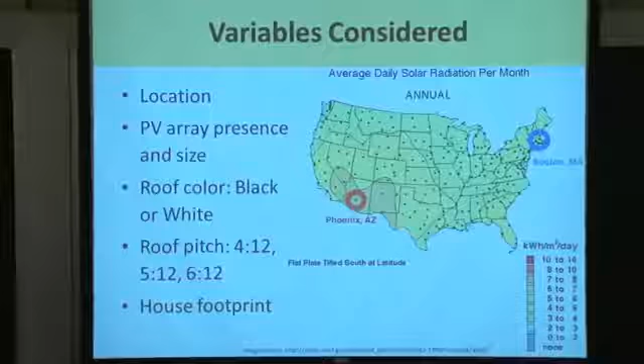We looked at roof pitch. First off, roof pitch is the angle of your roof. And we looked at this because we assumed that our panels were fixed and parallel to the roof. So this controlled what angle your solar panel was facing towards the sun. And finally, you had your house footprint, which is the area that the house covers. And when you combine that with the roof pitch, you get the area of the roof, which is really what we're concerned with.

We had 5 scenarios. And as you can kind of see from our cute little diagrams, we have a black roof, a white roof with a tree, a white roof with a solar panel, and a white roof with a solar panel and a cut tree so the solar panel is getting plenty of sunlight. In evaluating the 5 scenarios, we had 3 models of increasing complexity from left to right, which you can kind of note from the fact that Model 1 only covers 3 of the 5.

And these models all had common assumptions. The first was that you had a single-story house in a suburban location, so you didn't have shading from other buildings, for example. We had a common house size of about 2,000 square feet, or 186 square meters. The roof pitch, which in construction is set usually at 5/12, which means 5 inches of rise for 12 inches of travel.

We had an unfinished attic space, which means that it's sealed to the outside, but you didn't make it livable. A 5 kilowatt PV system covering 36 square meters. And we chose reflectance values of 0.08 for black and 0.35 for white. And this again reflects the effect that color has on heat absorption. With that, I will turn you over to Jordan.

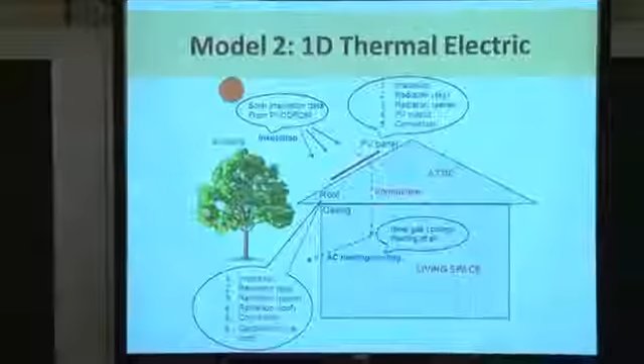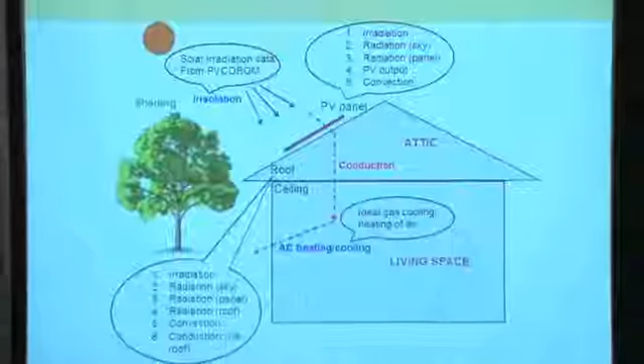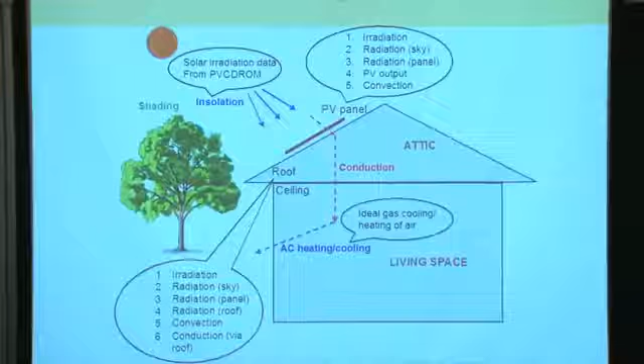We have a thermal model which takes into account several input conditions such as the insolation and shading, and it outputs a living space temperature, which is the temperature of the living room in our house. And then this temperature is fed into an electric model which calculates the cost and energy values, and thus we can compare energy production and energy consumption.

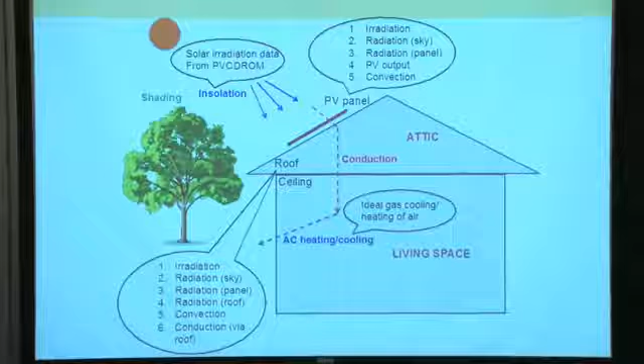To go into the thermal model in detail, I have just shown a picture here. So when we start from the top of the house, we use insolation and shading as the input parameters. We then calculate the temperature of the PV panel and then the temperature of the roof using 2 different energy balance models. And these 2 energy balance models are pretty robust in the sense that they consider all these physical phenomena which are realistic, such as the convection, radiation, and PV electrical output, and based on these energy balance equations, we can calculate the PV panel temperature and then the roof temperature.

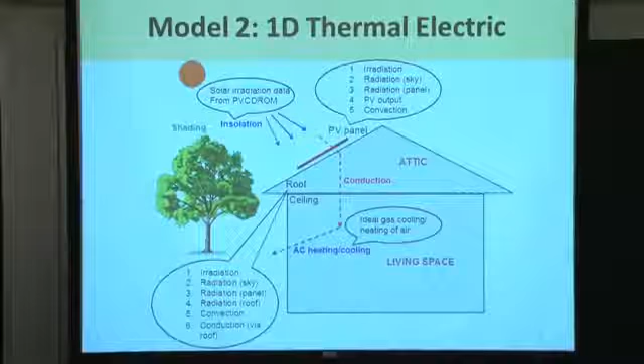And once we get these two temperatures, we get the heat flux that goes into the roof and that enters the attic. And once we get this, we find out the attic temperature, which then determines what is the ceiling temperature. And then we consider the conduction via ceiling, and then finally we end up with the living space temperature. And then we couple this living space temperature with another electric model, which I'll discuss now.

So the electric model is basically based on an ideal gas assumption. What it does is it calculates the energy needed by the AC, which could be either heating or cooling, in order to maintain the living space at a particular temperature. And we use this formula m dot Cp delta T, which is an ideal gas formula, which gives out the energy needed by the cooler. So the electrical model gives us the power consumption, and then we know the power production through PV output. So comparing these two, we can really assess whether PV installation is favorable or not.

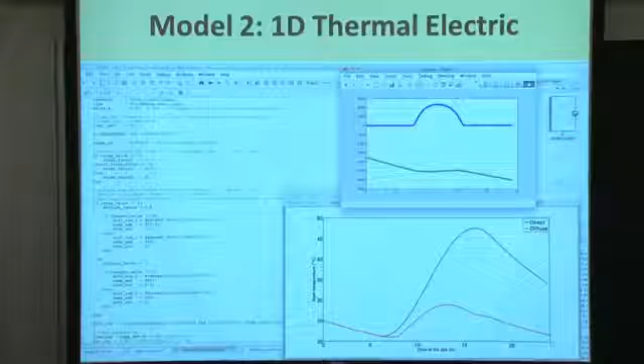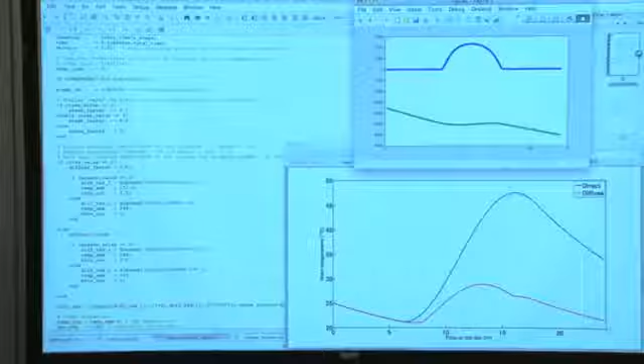And this is just the model in making. What we want to signify here is we actually made this model on our own, and this is the MATLAB code we wrote. And the model not only just predicts energy values, but it also can do a lot more things, such as predicting temperature. And what I've shown here is the PV output and then the cooling load that is required. So it can do a lot of other things as well. This is the temperature of the roof, in terms of direct sunlight and diffuse sunlight. So if anyone is interested, I'll be happy to discuss with them more.

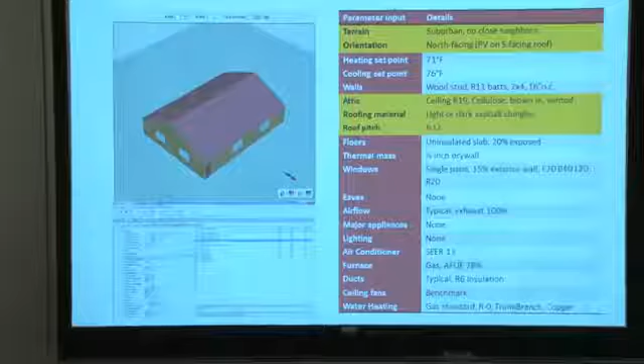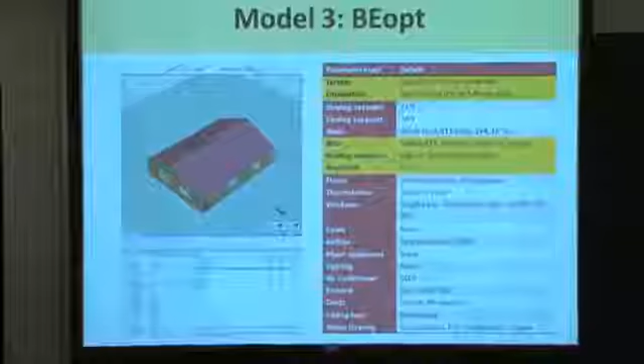So I take over from here talking about the third and most complex model that we used. For this model, we used two different softwares, one called BEopt from NREL, and the second called Energy Plus, which you'll see later, developed by the Department of Energy. So what we did in this model was we took into account the 3D effects of these thermal and electric loads that have been talked about in the other two models.

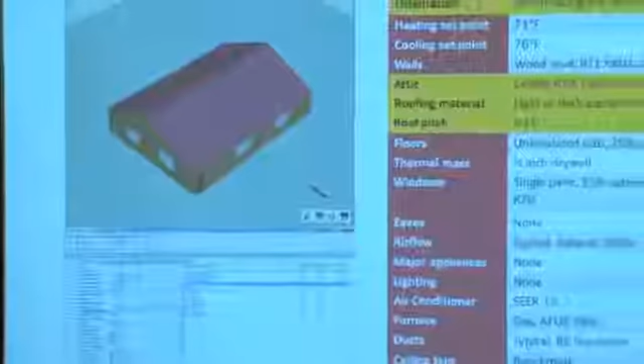The first thing we did was to actually model the 3D house, as you can see right over here. BEopt allows for a very nice interface where you can easily model the house and easily input a whole bunch of input parameters for the house. And for these input parameters, we consulted with an experienced building inspector for the construction inputs and used BEopt default values for the rest of the inputs.

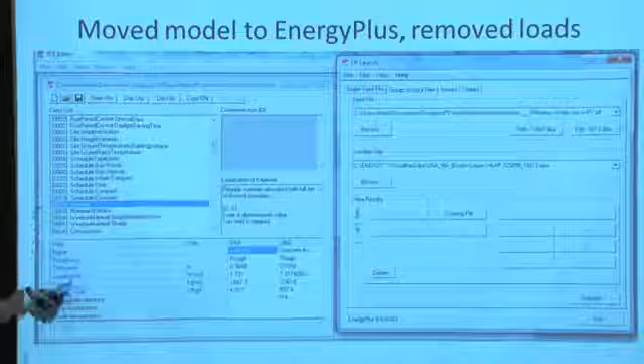Once this model of the house was done, we had to actually export it into Energy Plus, because Energy Plus gives us a much more detailed look into all these different parameters. And you can actually go in and modify different things. Like for the materials, we can modify every single material property: conductivity, density, specific heat. And we actually did that for the roof. And we also removed a whole bunch of other miscellaneous loads that BEopt had included.

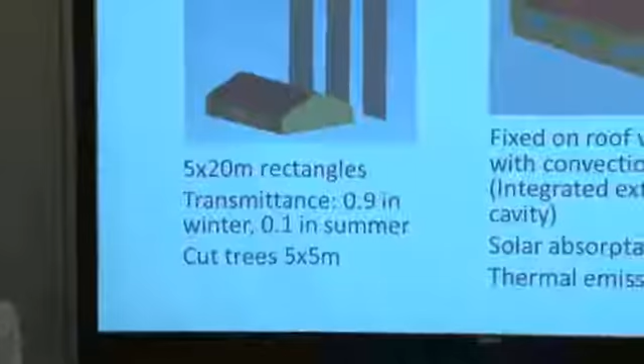So this is how we modeled the trees and the panels that we talked about in our scenarios before. For the trees, we modeled them as these really large 5 by 20 meter rectangles that act as shading for the house. The trees are located on the south side of the house, and we modeled them as deciduous trees. So we set up a transmittance schedule so that they have a higher transmittance in the winter when the leaves have fallen, and a lower one in the summer. And for the case of scenario E, in which the trees are cut, we modeled the trees as being 5 meters tall.

On the other hand, for the PV panel, we modeled it as being fixed on the roof. We actually had to completely change the model from BEopt because they modeled it as being decoupled from the entire system, placed 30 meters away from the house. So we completely changed that, and we read extensively into Energy Plus literature and found this particular object called the Integrated Exterior Vented Cavity Object.

And what this does is it models a surface as being, in our case, 0.05 meters away from the roof, and it models the convection and radiation between these two surfaces. We also considered the solar panel to have a solar absorptance of 0.92 and a thermal emissivity of 0.9.

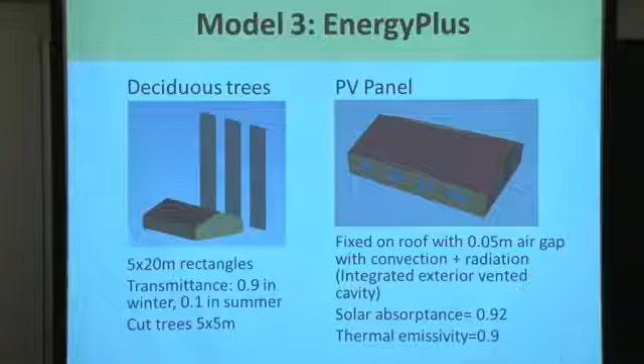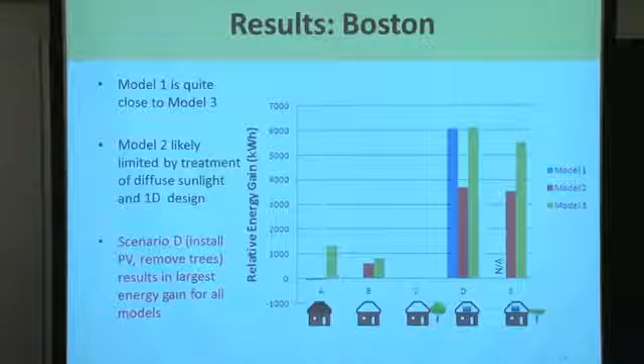Okay. And then, so we actually got a lot of results, as you might imagine, from all those different models. But just for the purposes of comparison for the presentation, we're just going to show you summarized results. And basically what we're showing you here is specifically for Boston. In this figure, the y-axis is the relative energy gain. So in order to compare them, we decided within each model to compare it to a common situation.

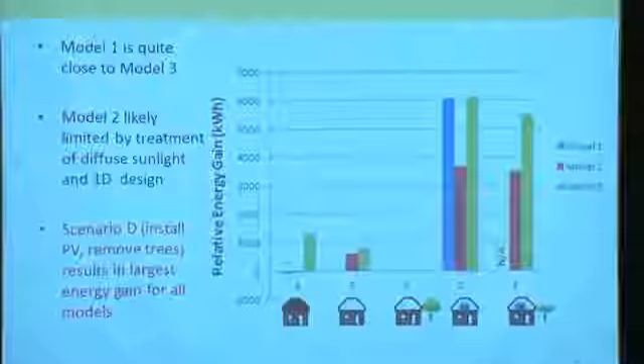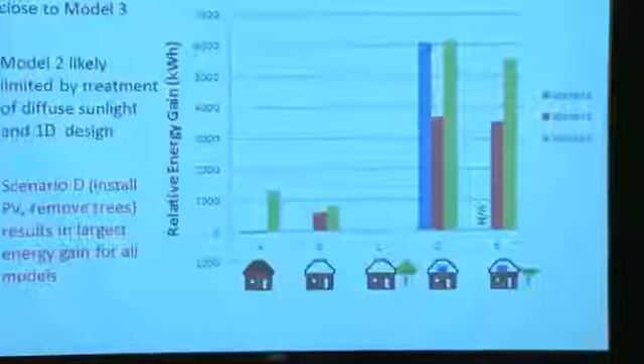So we decided to say that if we're in Boston, let's say we start with a white roof and a tree. So that's scenario C there, so that's why it's 0. So everything is in comparison to that. And right off, we could see that, as we might expect, putting a PV on makes sense energetically. And specifically scenario D, which is where you completely remove the tree instead of just cutting it, in Boston at least, is what makes the most sense.

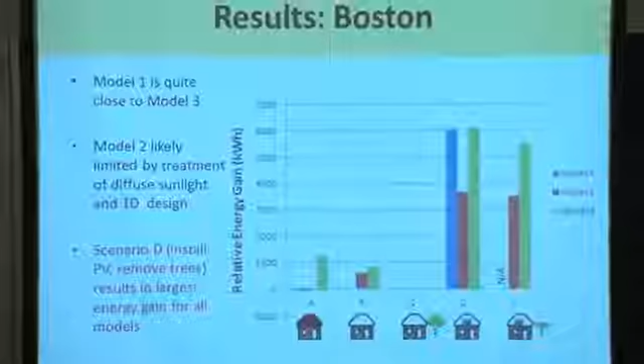And this is for all the models, although Model 1 can't really model a tree necessarily. So that's why it basically doesn't apply for that. In terms of comparing the results between the models, Model 1 actually does a pretty decent job in Boston in getting close to Model 3, which is impressive because Model 1 is significantly more crude, much simpler than Model 3, which required many, many inputs.

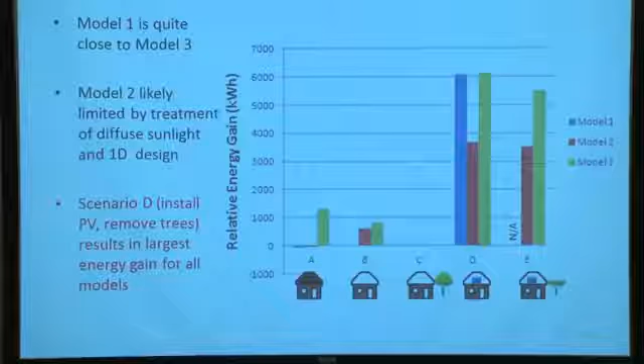And the reason we believe for the discrepancy between Models 2 and 3 is that in Model 2, the way that we treated the solar insolation, it doesn't treat diffuse sunlight differently, whereas the models in PV Watts and Energy Plus will take all that into account. So we think that's a large reason for that.

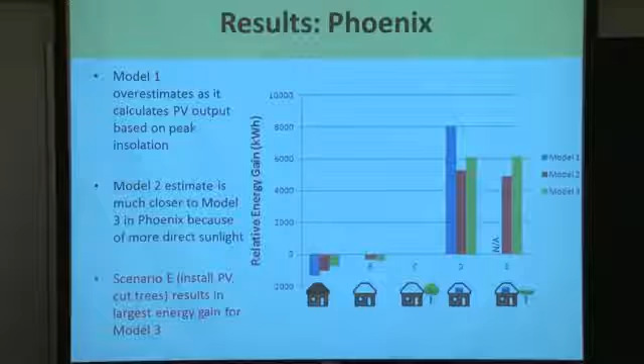And then a similar thing in Phoenix, and basically we see a slightly different case here, actually scenario E, where you install the PV but you cut the tree instead of completely removing it, gives you a slightly better increase in net energy gain. And this is again just in terms of energies, there could be rounding errors. This is ignoring the fact that if you cut a tree down, the net greenhouse gas emissions would be altered, and this is ignoring all those other effects. This is just in terms of net energy gain of the house.

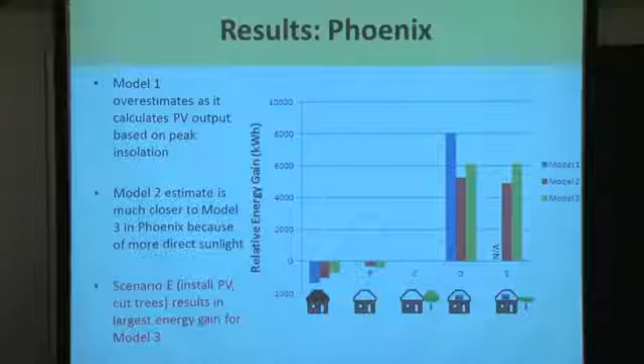And just to point out the discrepancy with Model 1 here, Model 1 is using PV Watts to get your energy output, and that's basically assuming peak power or peak solar insolation, whereas our models use more empirical formulas to get the estimates for your PV output.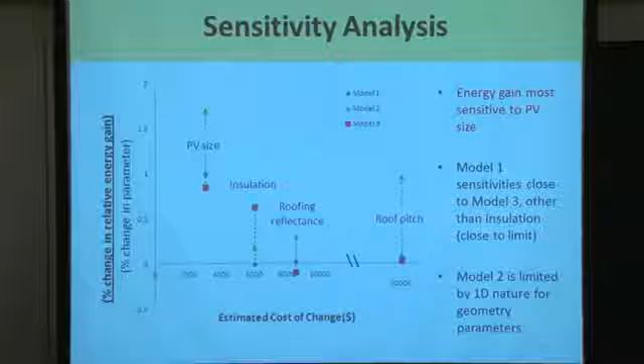And then the last thing we did to compare the models was a sort of sensitivity analysis. So on your y-axis, what you have is your % change in your relative energy gain, relative again to scenario C, divided by the % change in your parameters. So we just considered 4 parameters. The x-axis is a rough estimate of how difficult it would be to actually change that parameter in your house.

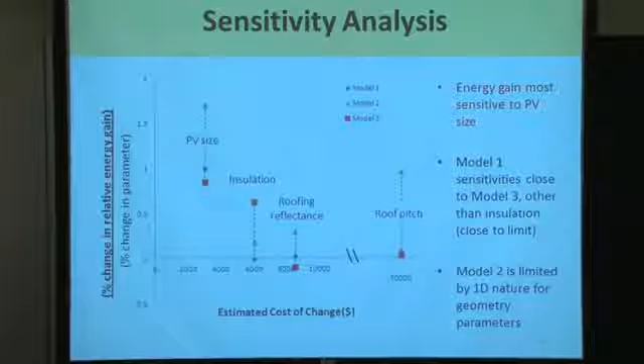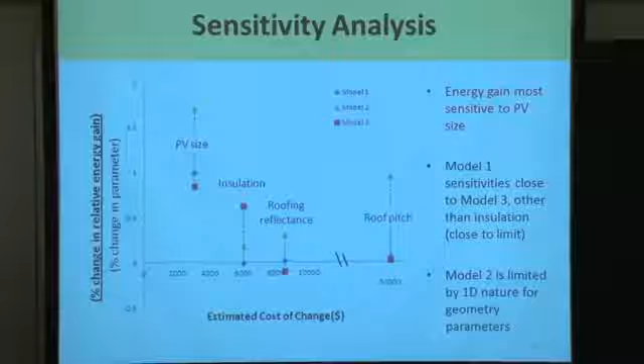So the far left one is the PV size. We just assumed you went from a 5 kilowatt to a 5.5 kilowatt. So that's why the price is roughly $3,000. We assumed about a $5 to $6 per watt installation cost for that. So that's basically the easiest one to do, and you get a very significant change in your thermal energy gains because of that. And just because of time, I'm going to brush through these, but basically a lot of the models follow similar trends in terms of the sensitivities.

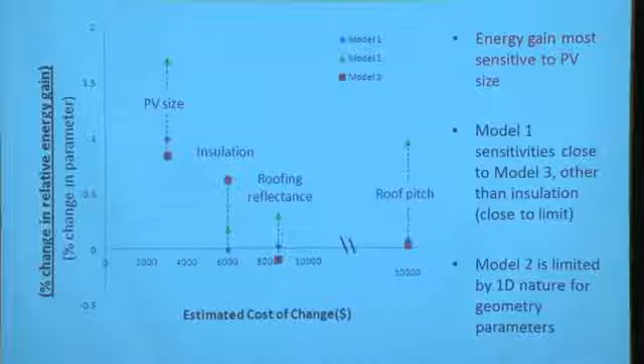The last one is the roof pitch. You obviously wouldn't really want to change that. It's very expensive to do. Luckily, for most of the models, it's not actually that sensitive to it, at least within a close amount to where you start. So in conclusion, in all 3 models, it makes sense to install a PV system. It's kind of what we expected from the beginning, but it's nice to get that sort of conclusion.

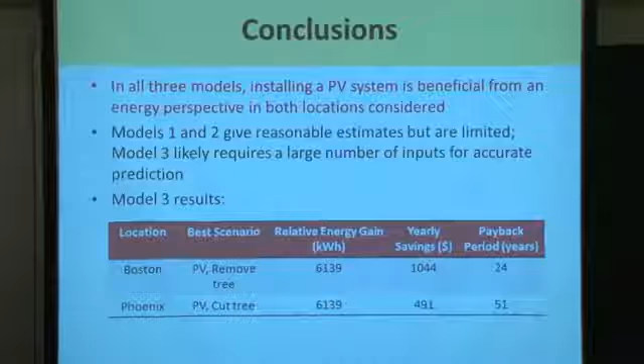For models 1 and 2, we actually were able to get pretty reasonable results, but they're limited in terms of what you can consider within those models. The advantage of looking at this is that if you have a user that isn't as familiar with Energy Plus in Model 3, which is very sophisticated and requires a lot of inputs, they can still get a rough estimate, which is relatively close, using these much simpler models.

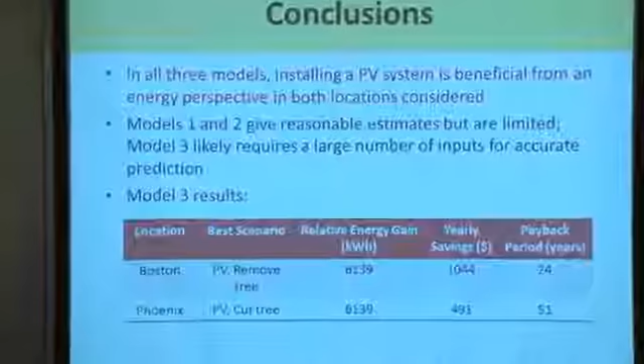In Model 3, again, we were taking that to be kind of the more realistic case, but you'd have to compare it to real life data and do an empirical analysis to see how close it actually does correlate. And then just, again, to summarize the results we got from Model 3, in Boston it makes sense to install the PV, but completely remove the tree, and your payback period is about 24 years. In Phoenix, the best scenario is to install the PV, cut the tree, and it's about 51 years. And interestingly, the maximum net relative energy gain was essentially the same in both, even though the scenarios were different.

So we'd just like to acknowledge Professor Buonassisi for helping assist us in guiding the direction of the project, and Brian Urban and other members at Fraunhofer for giving us guidance. And with that, we would like to ask you for questions.

Yeah. I have a question, because I grew up in a neighborhood that has a lot of trees, and so cutting down all the trees wouldn't be very practical. But did you at all consider PV systems that could handle shading at different times of the day, so like somehow decoupling different parts of it, knowing that some of them will be in sunlight for part of the day, some of them will be shaded, and that will change?

So you could make the model, especially in EnergyPlus, as complex as you want. We just did this for simplicity, just to kind of put boundaries around the problem we're considering. But you could definitely add that to the model if you wanted to. Cutting the tree was not about worrying whether some shading was going to bring down the rest of the cell. The reason we would cut the trees is to increase the maximum amount of sunlight per day hitting the panel. And because we were looking mostly at endpoints, trying to get the spectrum ends, that was why we went to such extremes. Cutting down selective trees or just parts of trees would be kind of the in-between that's a little bit more difficult to assess.

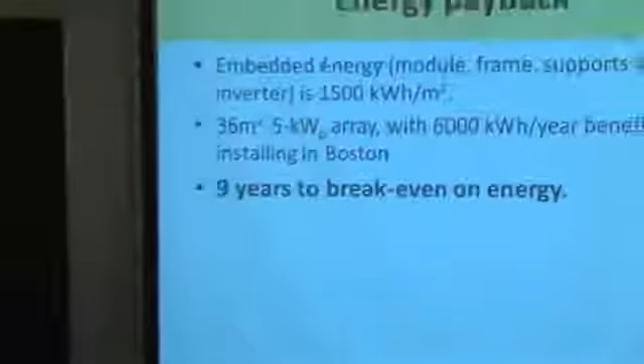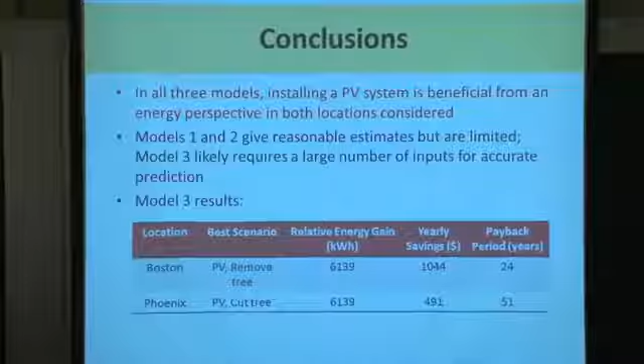A related question, actually. If you go back 2 slides, maybe. Yeah. It looked like the net energy gain was quite similar. So why the large difference in yearly savings and payback period? Just the cost of electricity in each location. Okay. We estimated it was about 7 cents per kilowatt hour in Phoenix and about 17 in Boston for residential. Which is why you would get a shorter payback period for Boston, because of the cost of the electricity that you're saving. So I would have assumed that the generation mix is similar. Is that regulatory, or I would assume they're both kind of coal and gas centric generation mixes? Yeah.

In terms of how the houses are? Oh, I mean, this is a little outside the scope of what you guys did. I was just curious if you guys had any sense of why the big difference in wholesale electricity prices between Boston and... Well, I think part of it is just how plentiful energy is. I mean, I guess Boston's at the very end in the corner of the U.S. It's more difficult to get fuel, oil, gas shipped over here.

I think Arizona, I mean, I think they're relatively close to a nuclear power plant over there. Oil. I think it's just location-wise. There's a lot of coal there. They actually ship a lot of the electricity to California because they can't produce it in California.

One quick question though. The relative energy gains are the same for both? Do you have different sized panels, or is heating that much? That's a big deal. So cutting. Yeah. Okay. So for Phoenix, sorry. For Phoenix, you can see this is the cooling over here and heating on the right over there.

And for Phoenix, you can just look at the values and see that there's a lot more cooling than heating compared to the Boston case, where there's a lot more heating by many orders of magnitude more, and so that kind of balances it out. And so that's only in the cutting down a tree case, right? If you were already well shaded or not shaded at all. These are actually all the curves for all the scenarios. I see. Okay. Yeah. So it does matter just because of location.

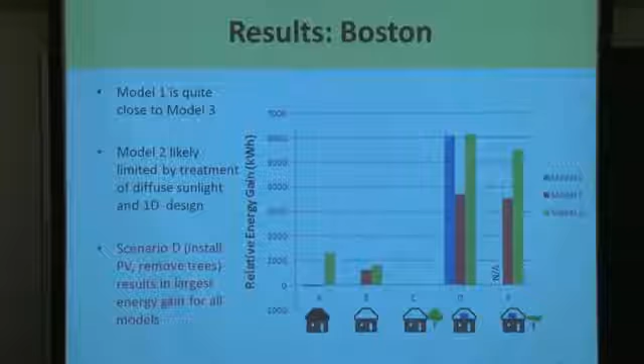So wait. So if you're not cutting down a tree, then there's no decrease in shading, or is it just the panel itself that's heating up more? Well, actually, if you go back to... Sorry, I think I've missed something. So here, actually, in Boston, it actually makes more sense to have a black roof than a white roof. So shading isn't necessarily good in Boston, just because there's so much heating that you need in the winter. It seems to be the dominant effect in Boston, and then in Phoenix, it's the opposite. The cooling is the dominant effect.

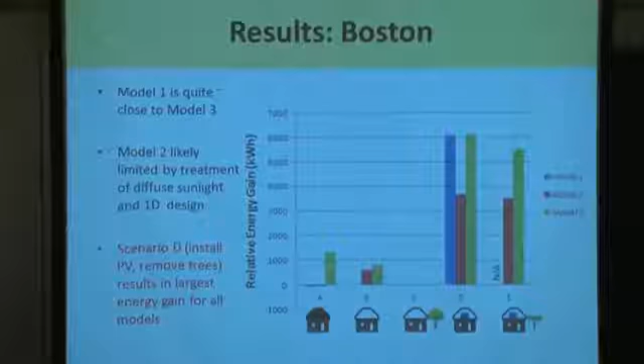Did you consider the possibility that snow also insulates the house once it falls on the roof? No. We did not. I don't know if that's built in, I don't know what would happen. No, I don't think we did. But that's a good point.

Along those lines, do you have any intuition as to why in one case it's better to cut down the tree rather than remove it, and in the other it's better to remove it rather than just cut it down? Are you expecting it to grow back and then have to incur more costs because you're going to have to cut it down again, or what's going on? Well, just in terms of pure energy, it was very, very slightly better in this case to have the tree just cut. Just in terms of the balance between heating and cooling loads that you have. I may be able to help clarify that.

The idea is in Boston, we're relatively cold most of the year, so the more sunlight that hits your house is going to add more heat to your house, and that's less heat or energy that you have to pay for. So the reason that it's beneficial to cut down the tree completely in Boston is because it allows more sunlight to hit your house. Whereas in Phoenix, you don't want the sunlight to hit your house. If you cut down the tree completely, that's more you have to pay for AC in the summer.

So what's the difference between cutting the tree and removing it? Cutting the tree is assuming that you're going to maintain it at that certain level. So by cutting the tree, you keep a certain amount of shading on the lower part of your house, but you still allow sunlight to hit your solar panel. Cutting down the tree completely means that there's no shading on your house at all.

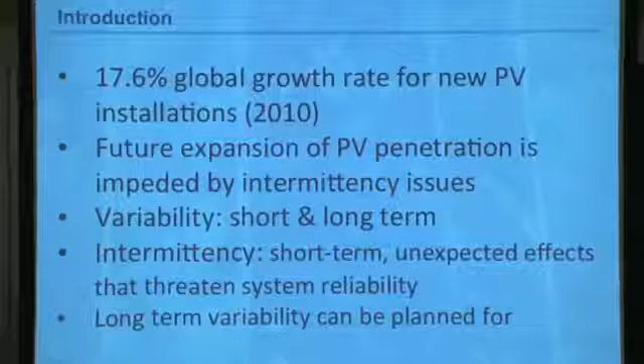So as we discussed in class, there's variability in terms of the solar resource, both on a long-term scale and on a short-term scale, seconds to minutes. On a long-term scale, we're talking about the position of the sun relative to the earth and so on. In that respect, that is predictable and can be planned for. When we talk about intermittency, we mean the short-term unpredictable effects that change the power output significantly.

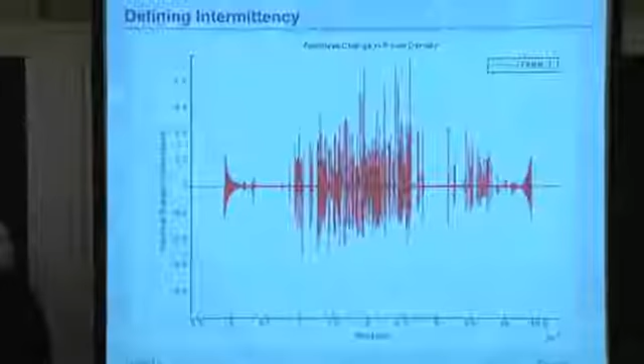So what we have here is the fractional change in power output over the course of one day. As you can see, between 2 consecutive seconds, the power output can almost double, and at other times it can drop by half. From a system operator perspective, that's obviously a major challenge because demand should match supply at all times. These intermittency issues arise due to regional weather patterns that can be predicted, and also due to local weather patterns that are less predictable.

So in our project, what we try to address is: can the weather report be used to predict the power output from an ensemble of smaller distributed PV systems? That is, can we average out these less predictable local intermittency effects? And I'll give it to Mary to discuss our approach.

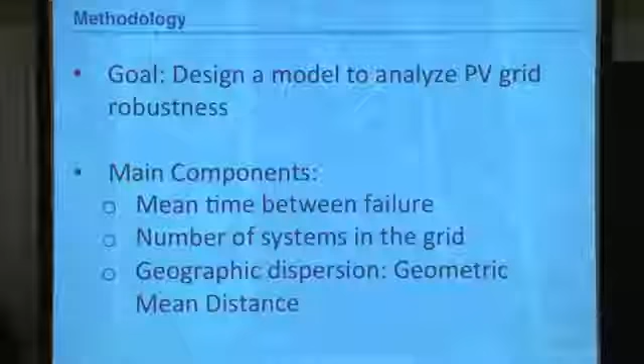So our goal of this project was to design a model that could quantitatively analyze a PV grid and determine its robustness in terms of variability. And our main components were mean time between failure, which is the average time between two system failures, which Rita will define and discuss later, number of systems in the grid, and geographic dispersion, which we measured through geometric mean distance.

Our data set was from the Oahu Airport, which is part of the National Renewable Energy Laboratory. There are 17 systems, all within about a kilometer of each other, so it's a very small, very dense system, but there was second interval data for a year, which we used, and so it was a fair amount of data to give us an estimate of how intermittency varies over the course of a system and the number of systems and density.

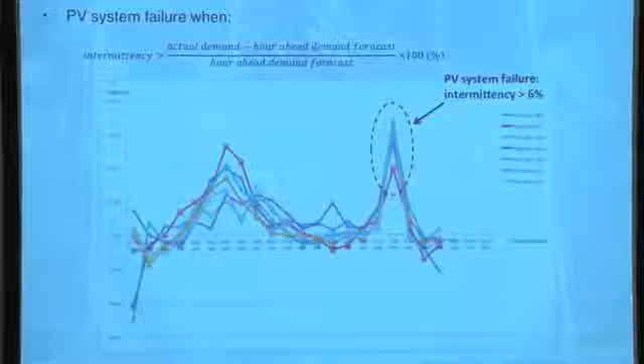So our first step was to define what was a PV system failure. In order to do so, we accessed the CAISO website, that is the California Independent System Operator, and we took the data from 1 week of the actual demand and the hour-ahead demand forecast. They give this value for every hour, so we took the value for every hour of the week. And then we plotted in this graph that we have a line for each day of the week, and we can see that both the magnitudes and the shapes throughout the week are almost the same.

We can also see that the values are almost all positive. This means that they usually underestimate. They usually think that the demand is going to be under what it really happens. And so what we defined was that if this estimation is okay for CAISO, if they can manage the grid with this variation, then they could also manage the grid with this variation in PV output. And so we looked at 5 p.m., that it's the hour that we have the biggest variation between the two, and we averaged the value and we got to 6%.

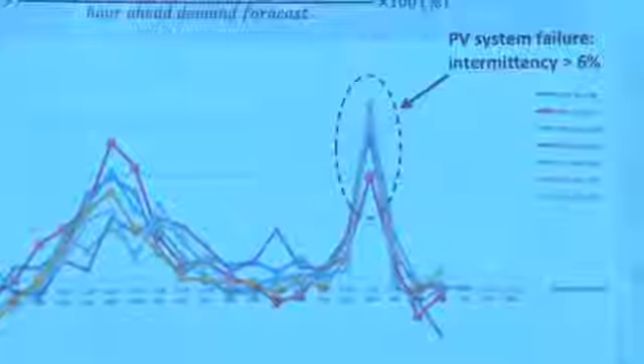So this means that if our intermittency is above 6%, we're going to have a PV system failure. If the variation is below 6%, then the intermittency is not going to be a failure. Then we could define the mean time between failures, that it's the mean time between two intermittencies higher than 6%.

Okay, now that we have some context of what the problem is and we have an idea of what variability is and we have a data set to work with, I'm going to talk about how we actually solve the problem. We use coding in MATLAB to handle this huge data set. NREL had 17 systems out there for every second of an entire year. And so we took all the files from NREL and put them all into one huge matrix.

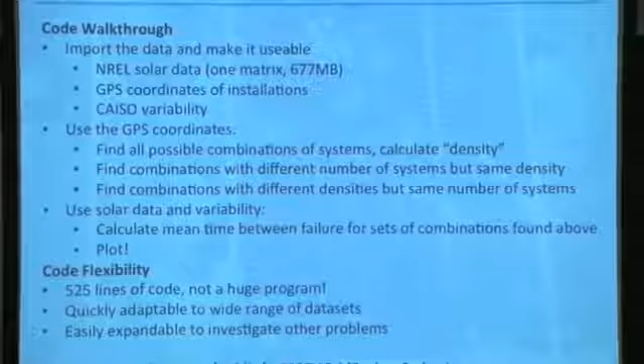You can imagine it ended up being about 23 fields by several million, and it's about 677 megabytes. So actually handling the data was an issue in itself. I don't recommend it with an old computer. And we also had the GPS coordinates for each of those locations and the variability from the California ISO. So with that data, we could begin to build our code to figure out a quantitative description of failure, a mean time between failure, and kind of our idea of density.

So once everything was loaded into one big matrix that we could work with, we moved on to use the GPS coordinates. And of those 17 systems, we found every single combination of 17 choose 2, 17 choose 3, every kind of possible way that you could connect these systems, and came up with something like 60,000 different ways of connecting these. And then for each possible connection, we had a function that would calculate this geometric mean distance that would kind of give you an idea of the density of that particular connection.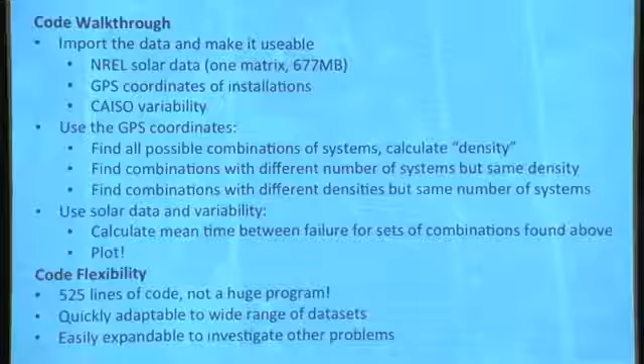17 choose 8 gave us like 24,000 possible ways to connect them. We searched through and found varying densities for one set number. Then finally we wrote a function that calculated the mean time between failure, that went through our data from NREL, looked at the fractional difference and said, okay, each time it's above 6%, that's a failure, and then measured that distance and took the average of that. That was our mean time between failure.

And then finally, once we had all that together, we crunched all the numbers. It took a long time on my computer. We were able to plot it together and get some very nice trends. One of the great things I think about our code is that it was only 525 lines. And if you've ever built a program or a big application, that's really small. It's very easy just to go in and see exactly what's going on.

So it's very flexible. We could hand it off to another company, to another research group, and they could go in and adapt it to just about any data set. If you are able to get data from California or from Germany or from somewhere else and bring it into our format, it's very easy just to plug it in and run the data. Very, very minimal changes within our code. And then you could also build on our code to look at other problems.

So we have the variability data as a function of time. We also have the solar output as a function of time. So you could conceivably go in and figure out how your mean time between failure changes based on the time of day, and change your critical percentage based on the time of day. And there are several other problems that you could launch off of our code and continue on.

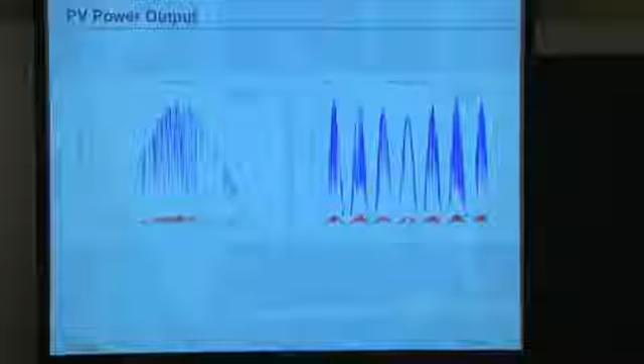So the first thing that we did in order to try to see the trends in these huge fields of data was just to plot the data. It was actually a much bigger task than I thought it was going to be. The plot on the left is for 1 day's worth of data, and the plot on the right is 1 week's worth of data. The y-axis is power density in watts per square meter, and the x-axis is the time in seconds. The blue is all 17 of our systems together, and the red is just for one system.

So as you would assume, the power output for all 17 together is clearly a lot greater than the output from just one system. But this gave us a sense of being able to see fluctuations within 1 day, and also we were able to see when the sun rose and peaked and also fell each day.

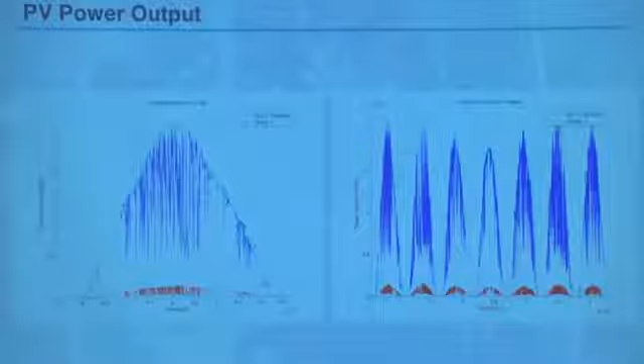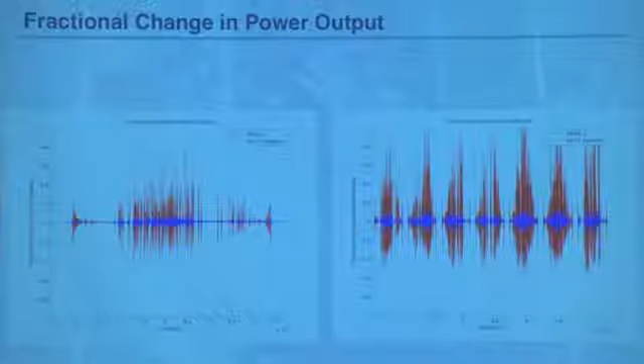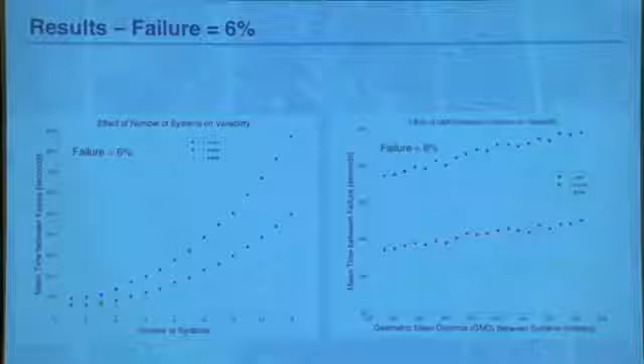So Rita earlier mentioned that we use 6% as our cutoff for failure. We actually went ahead and did 6%, 12%, and 18% just to see how sensitive our analysis was to that threshold value. So here we have plotted on the left the mean time between failure versus the number of systems, and then on the right, mean time between failure versus the geometric mean distance.

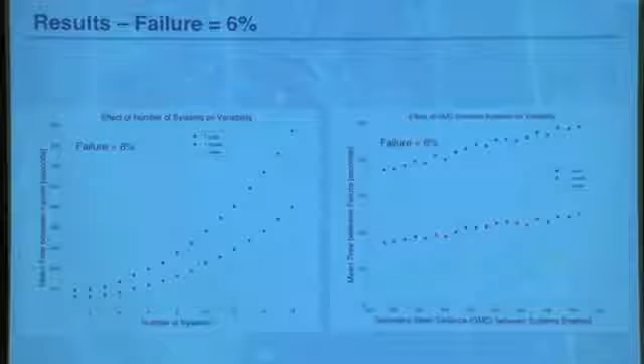I also calculated these values using a week's worth of data, a month's worth of data, and a year's worth of data. So the week would give you more fluctuations, but the year would give you the more long-term overall system behavior. The relationship between the mean time between failure and number of systems is quadratic, and we found a linear relationship between the mean time between failure and the GMD.

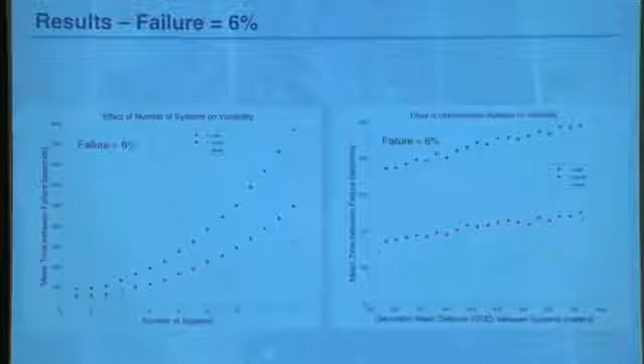So after plotting those graphs, we could take our conclusions and answer our question. And so the first thing that we noticed, and what we were expecting, is that a big data sample should be used if conclusions are going to be used as a design tool. As Ashley said, we used a week, a month, and a year. And so we know that the bigger the data set, it's not going to be influenced by abnormal things that can happen in a given day.

And we also saw that there's a linear relation between mean time between failure and GMD. When GMD increases, that is when density decreases, we're going to have an increase in mean time between failure. This was also what we were expecting, because the local effects will not affect systems that are further apart.

We also saw that there's a quadratic relation between mean time between failure and number of systems. Number of systems increased, mean time between failures also increased. This was also according to what we expected, because we know that the percentage in the total output is going to be lower.

So this was for 8, right? The right-hand graph held the number of systems at 8. So if you had 8 houses spread apart by an average of 150 meters, and you considered a year's worth of data, is it like 250? I just can't see it. So you'd have a mean time between failure of 250 seconds, which is like 4 minutes. Doing math under pressure. Right, but if you have a grid to back that up, it's not that big of a deal, I think.

I'm confused about the plot on the right here. What it's suggesting is that the one week you picked was significantly below the year average. Right. And so you could have equally picked another week that was significantly above. Right. This was, I think, just to give the trend.

Yeah. The relationship between a week and a month and a year is just the week we picked, the month we picked. I think you see on some of the other plots that the week and the month actually shift. It's just, the year was kind of the average of those.

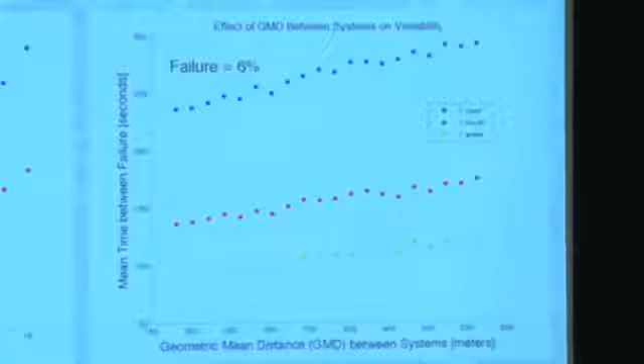I would assume that areas, or specifically countries that have made large investments in solar, would have studied this question in a detailed fashion. Do you know if, for example, Germany or Spain have looked at this problem when it's spread across hundreds of kilometers? Ibrahim, do you know that one?

We didn't find a lot of literature actually. For wind, there was a lot of data out there, but for high penetration levels with PV, there were very few studies. Most of them actually were addressing the US. I didn't find any on Germany or Spain. Maybe they're in Spanish or German, so I don't know. Do you have an idea?

So what I find really startling is that for a given system, the time between failure, the 6% intermittency, is on the order of a minute, right? Do you have any idea if that's vastly different for wind? I'm just wondering, from your literature searching. It seems like you have this big rotor, there's some momentum in it, and to slow that thing down requires more time.

Yeah, as opposed to electrons, wind would definitely have a much longer time scale than solar, I think. There's a lot of momentum there. But when wind stops, the time that you have intermittency is going to be much bigger, so your backup system is going to have to take over the load for a longer period of time. And maybe in high winds, if the turbine's spinning too fast, you actually have to stop it, so there you would run into variability on the order of minutes.